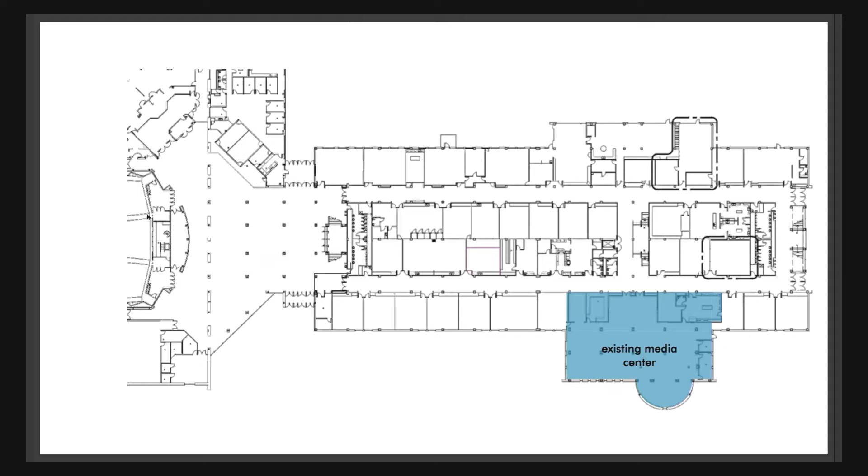So this is showing the existing location for the media center, and this is showing a proposal for where the media center would be. The location to the left of the screen is the entry dining commons, so we would be connecting the dining commons to a stair that connects first and second floors, that ultimately connects to this new media center, which is acoustically separated from the rest of the school but visually very open through glass.

The other thing this was doing was trying to create a dining facility that integrated more learning environments, so that the dining facility was used 8 hours of the day for breakout learning purposes versus just the 2 hours for lunch.

So extending what the resources would be as a library, we were asking ourselves what all could you integrate within this resource: creating larger learning pockets or pull-out spaces for students, a place for all learners, a place for self-directed learning, meaning you wouldn't necessarily need teachers involved in what's happening in some of those spaces, a place for digital creation, student success, a great environment for reading and literature, public forums or pitch space for students to present their work, and certainly a place that's flexible so this media center can continue to evolve.

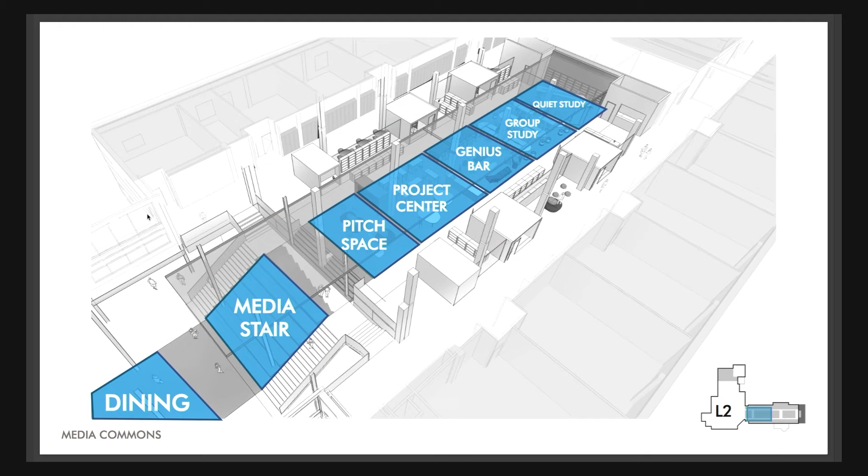And just for orientation, where you're seeing this new media stair, this is where there's an existing staircase to get to the second floor. You don't have visual connection to the second floor in this location, but we're just reorganizing how that works.

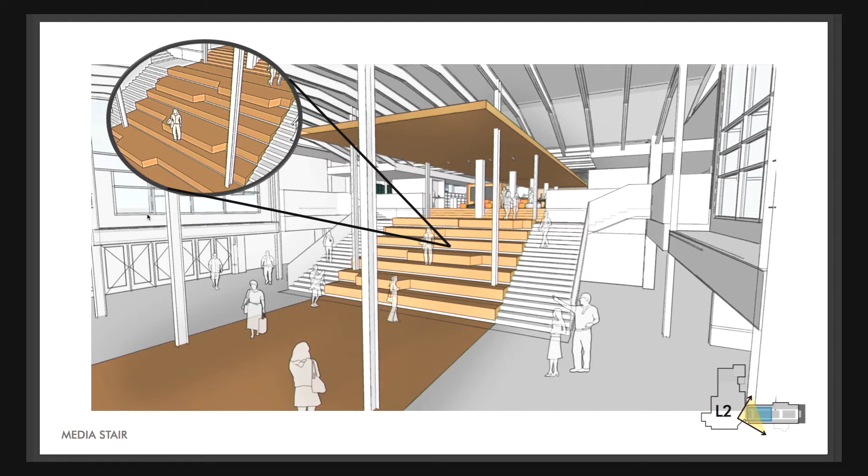So this is a slightly more eye-level view looking at the media stair connecting those two spaces. These are deep treads so students can use this space for dining, student breakout, or social engagement. We're thinking there may be a large projection screen, so you could get 50 to 100 students on this stair looking at a larger presentation for a pitch space or presentation space. It would be used for a variety of purposes, and this is just some examples of what that might look like.

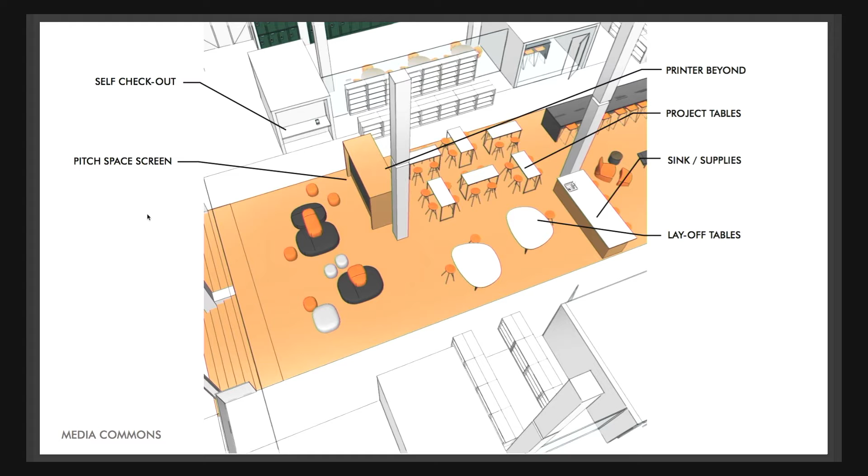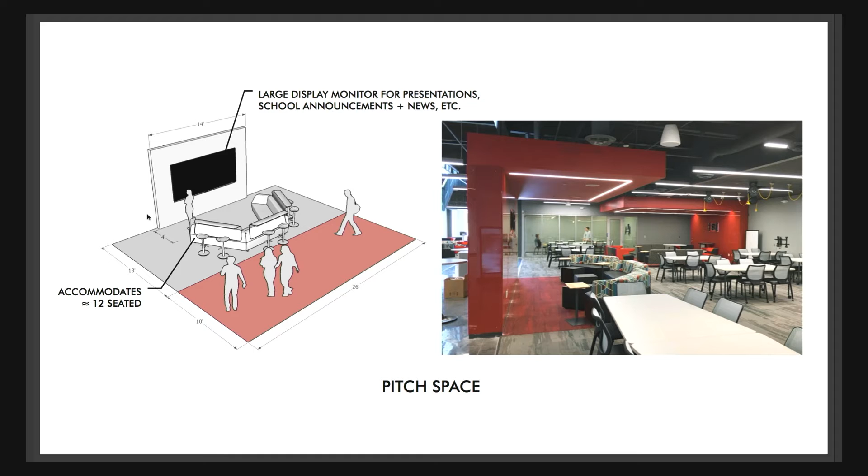As we move further to the east through the library, we're integrating pitch space, small group space for students to present their work. This might be the size of a classroom or smaller. Checkout stations, and an area we're calling a project center, more for self-directed learning—it's like a soft maker space for students to do small projects. These are just a couple examples of those types of spaces: pitch space tied to audiovisual, and project centers where you might have printers, supplies, large work surfaces.

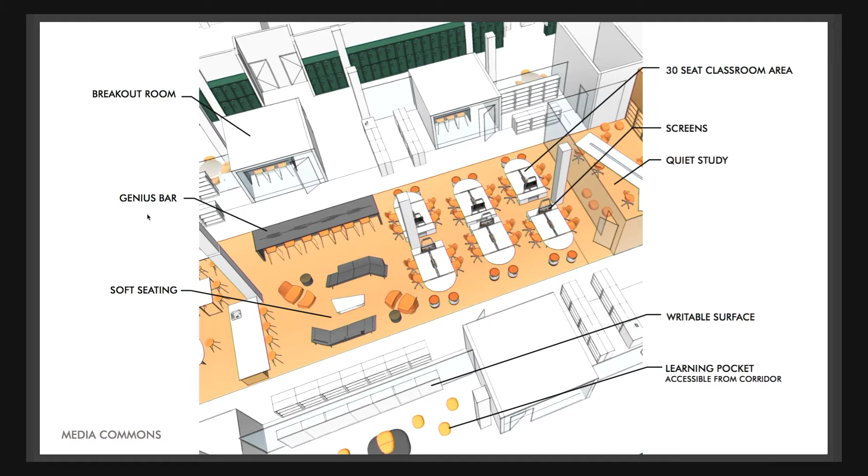Moving further east into the library, we're integrating a space we're calling a genius bar. This would be an area where you'd get library assistants or IT assistants, bringing IT into the media center in a much more robust way—also a way of increasing utilization of the space. Creating soft seating that's open, and a larger gathering space of approximately 30 students. This would simply be to bring a normal class into the library, very similar to how it's used today. And some examples of those spaces.

So a support center—that's student success, library support, IT support—and quiet zones.

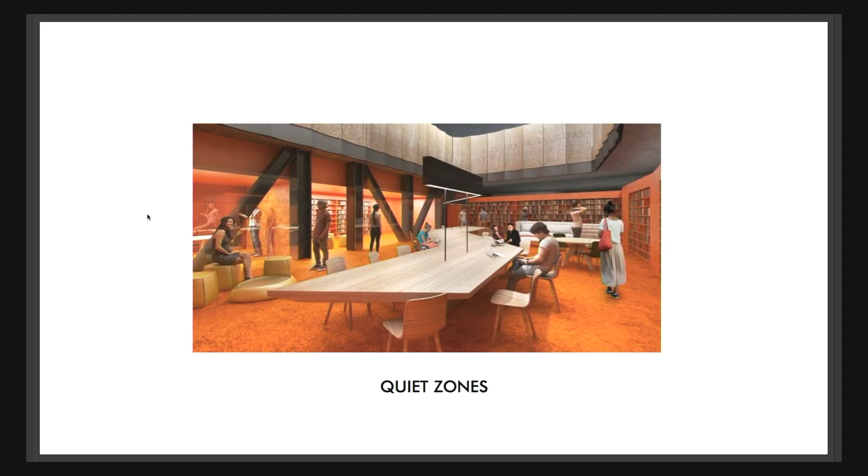That we are creating between the media center and the primary corridors. So this is really a buffer space where there's books and breakout areas so that you create a quieter environment within the media center.

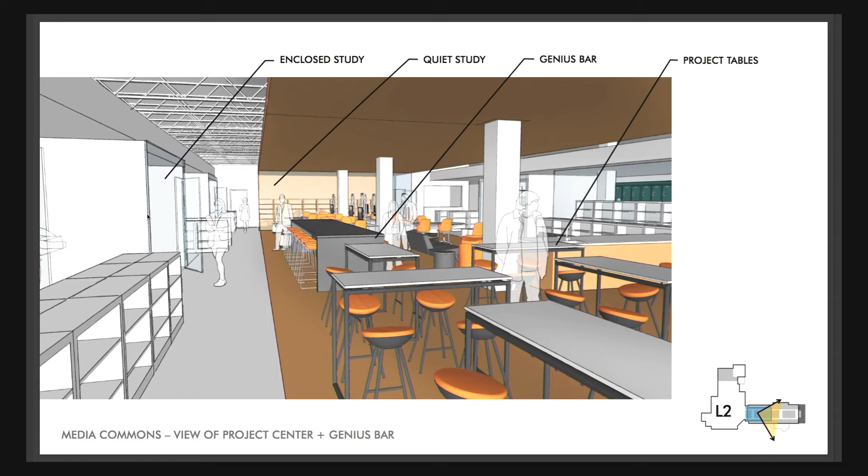And we're returning the corridors that currently look like this, to that—so again, we're creating a visual connection to the media center, being very open, but for the most part being acoustically separated from the corridors.

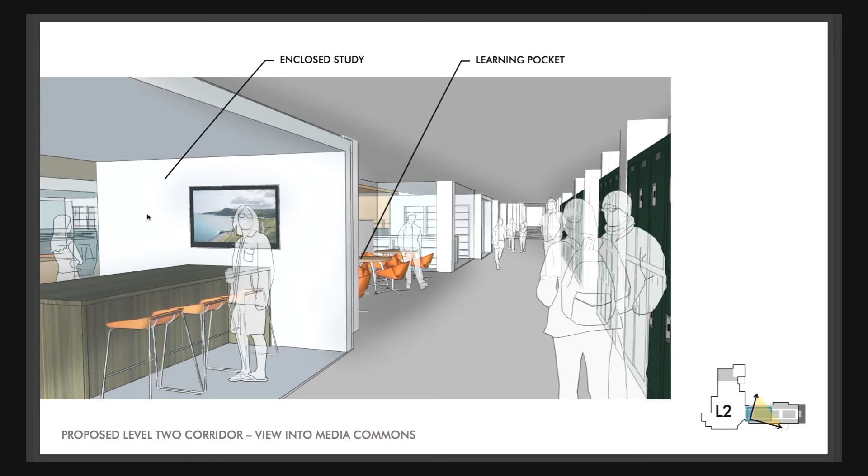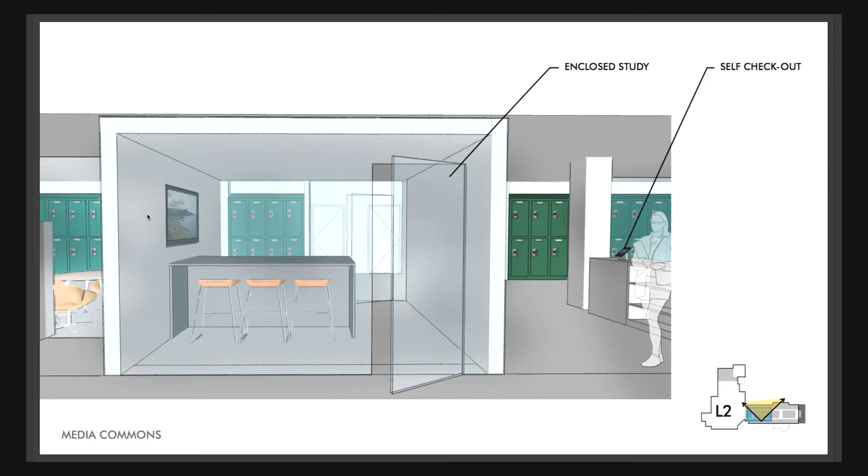Within those breakout areas, you would have group work or pull-out space from the classrooms. These spaces could be used by both the media center or from the classrooms for pull-out. This is an example of what that might look like—typically spaces that would seat 4 to 6 students, with a direct line of sight to the adjacent classrooms.

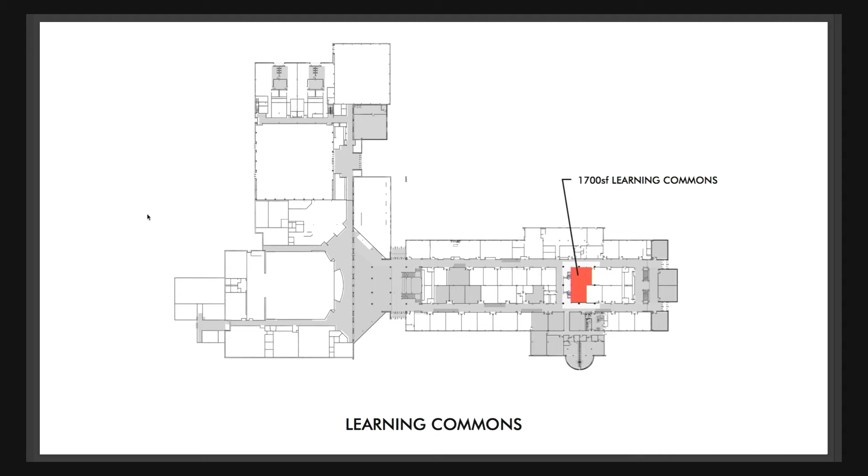Moving to some of the other program within the school, we have a centrally located learning commons. This is a programmatic piece that was in the original master plan. It serves a multitude of functions—it's really a multi-purpose space for the school. It can be an area for all faculty meetings, an area for testing, or more of a traditional learning commons for project-based learning, where one or two classrooms pull out into this space. It's larger, and it allows for more hands-on activities.

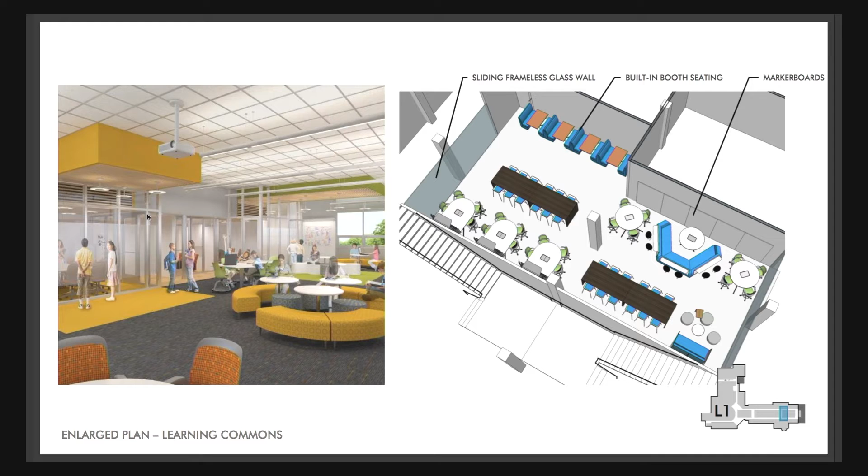This is an example of what that might look like on the left, and on the right, this is the actual space that's been carved out for that within Free State High School—about 1,700 square feet, compared to the 700 to 720 square feet of a normal classroom. So it's a considerably larger space.

One of the primary objectives within the master plan that we're still carrying forward is creating secondary and tertiary learning spaces throughout the school. These are areas outside of the primary classroom where students usually pull out to do other activities. We know through our experience that creating those spaces directly outside of the classroom, to the extent possible, is when those areas are most effective, and having transparency to those areas is critical.

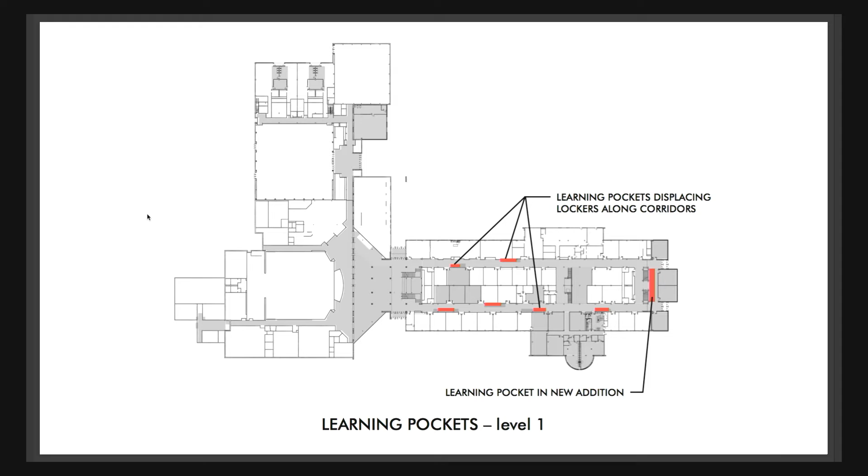So we've removed lockers for the studies we discussed earlier in strategic locations so that we could create these learning pockets adjacent to classrooms. You can see they're scattered throughout level 1 and level 2, and the 3 red areas on the left side are the ones shared by the media center as well.

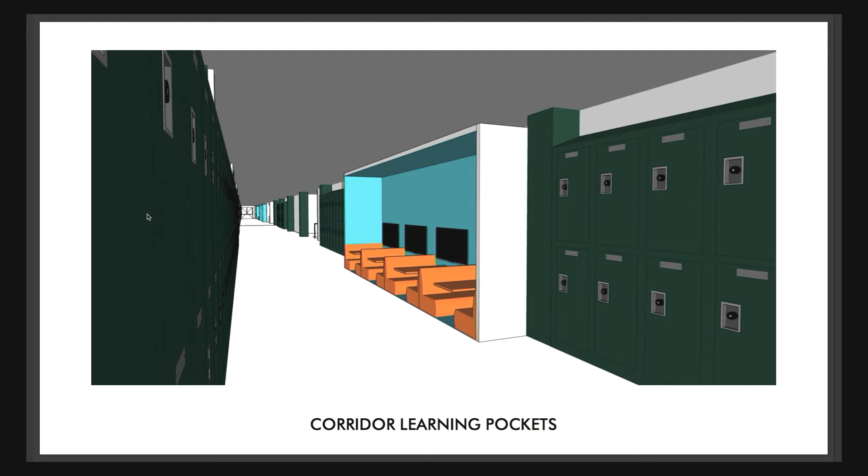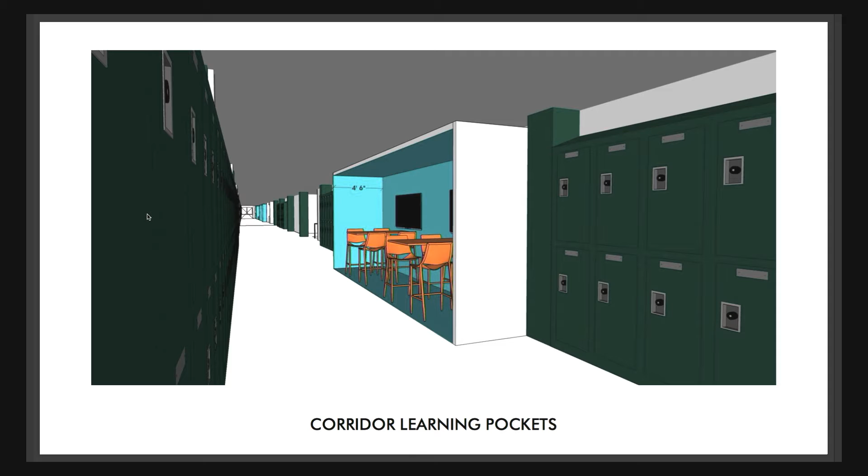And this is just a rendering of what those might look like. We've removed lockers in part of the corridor, and in this particular case, we've created bench seating, so this area might seat 4 students. It'd be tied to monitors for connecting AV, and this is a furniture solution that's very similar to that, providing a variety of seating environments, directly tied to the classrooms for secondary learning.

Special education is moving to the location vacated by the media center. The benefit to this space is that it's a 2-story, or about a 1.5 story volume in some locations, so it's taller, but they also get natural daylighting, which they did not have before.

We're also able to accommodate in this area the diagram we presented in the master plan. We created a new diagram working with the district's special education group, and that would be more flexible in accommodating some of the future needs for that specific program.

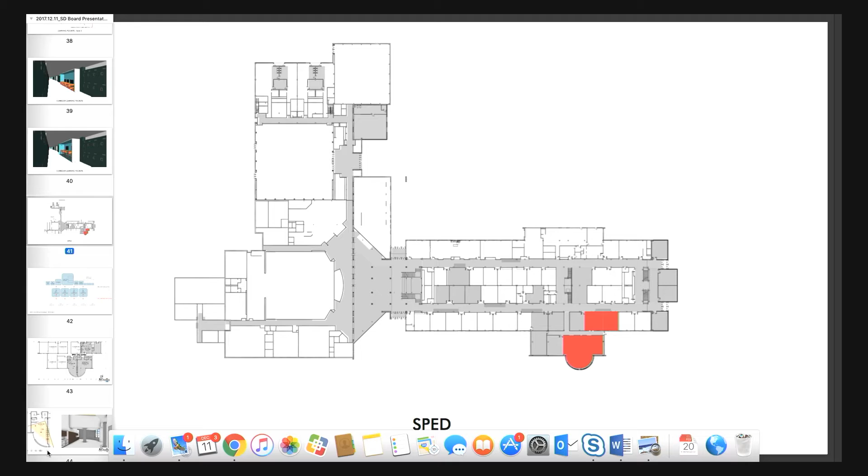Can you flip back a couple screens? Does everybody remember where the SPED rooms are now? The rooms that are kind of in the middle - that's where the current SPED is, right there. Good point. Nice if we all knew the building.

Yes, the design team - if I'm saying something that's lost you, please stop me and I'd be happy to go into more depth. But yes, they were basically embedded within the school, and so that program didn't receive any natural daylighting, so we see this as being a huge advantage for that particular group.

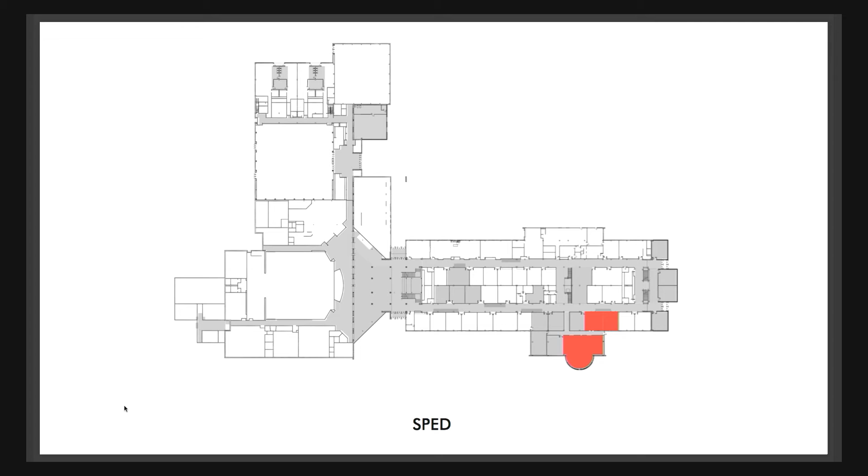These other 5 rooms labeled classroom are recaptured classrooms where media was before, so we've created classrooms to the same size standard as the rest of the school. One of the goals is to increase classroom capacity to accommodate an ultimate population of 2,000 students. The math worked out is to create an 80% occupancy of classrooms at 2,000 students, with 30 students in every classroom.

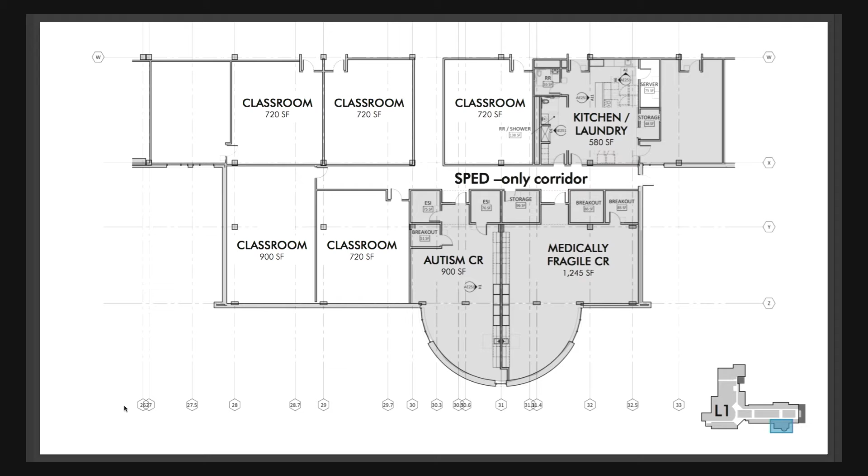So that's how we arrived at the number of additional classrooms you would need. What that came to is 7 additional classrooms, and you'll see in a moment that we ended up with 8 - so we achieved some additional classroom capacity even beyond what we had in the master plan.

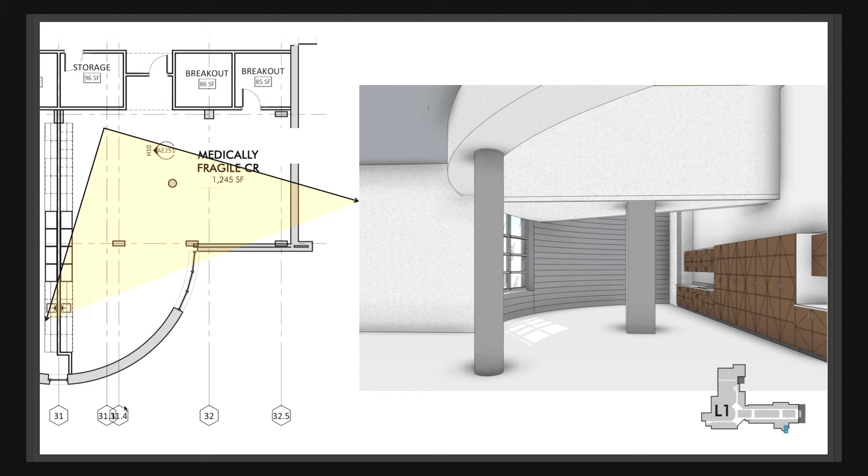This is just a couple eye-level views of those 2 special education classrooms, the Autism Room and the medically fragile room, again illustrating the higher volume space and some of the daylighting.

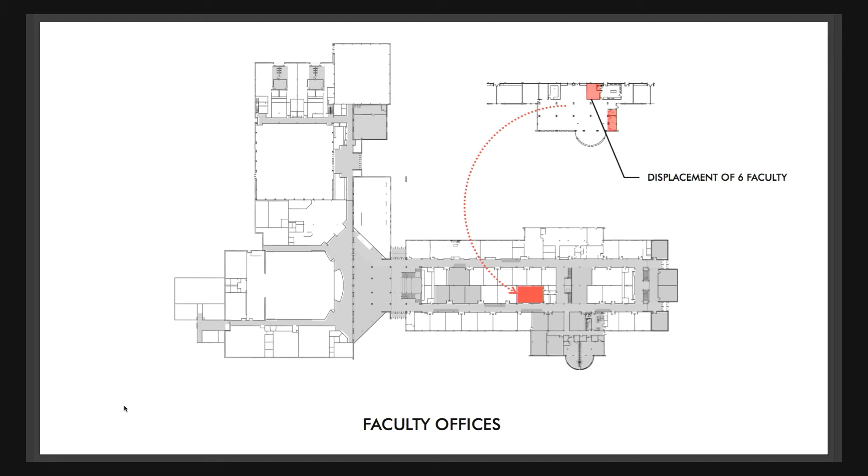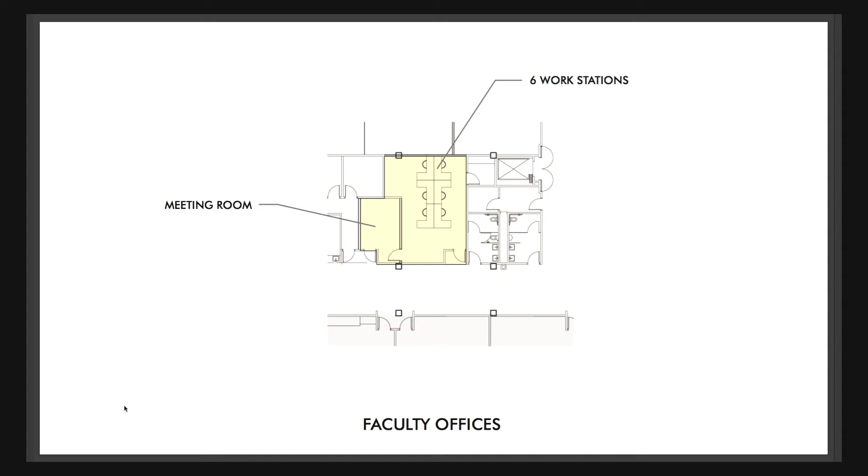In moving the Media Center program out of their current location, we've displaced some offices, so this is showing the relocation of those offices. And this is how that lays out - we've created a shared environment for the 6 faculty workers who had a shared environment before, but we've added a meeting room that they did not have before.

Creating all gender facilities was also a goal for all the schools touched in this bond issue to some extent. For this school, we've created 1 restroom bank that is all gender. The way we're doing that is creating an environment with open sight lines from the primary corridors, but every restroom is in its own room - individual rooms versus being gender specific.

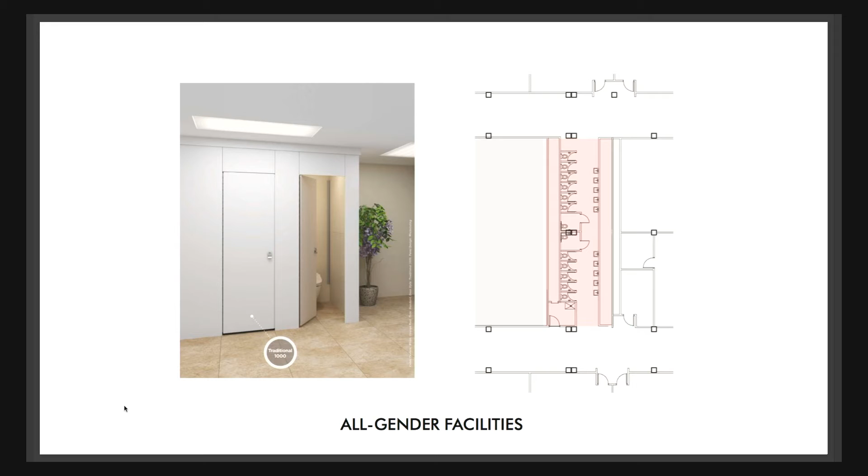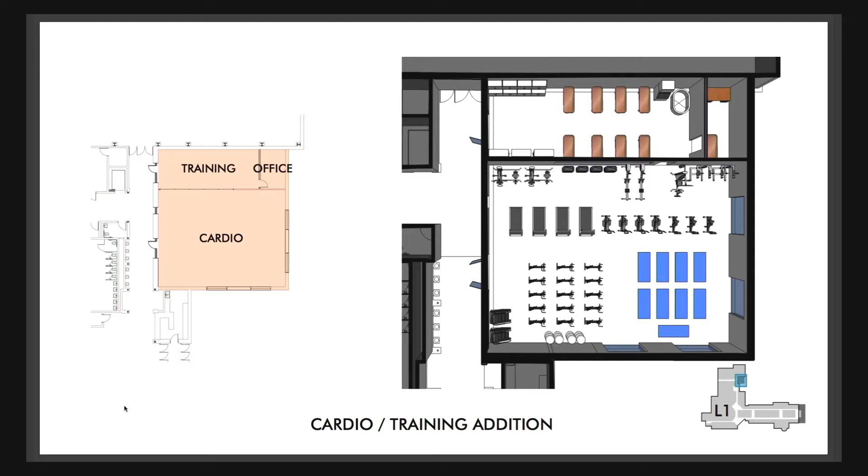Looking at athletics, there's several locations where we've made improvements. There's a 3,000 square foot addition on the north side of the building for cardio and training - that's what you're seeing on the right. The locker room renovations include taking the gang showers and converting those to an office suite. The idea of centralizing that office suite is so you have sight lines to the students at all times, and then individual shower stalls, in lieu of the gang showers they had before.

Where the private offices were before, we've changed those to private changing rooms, again just trying to increase the private opportunities for any of the students relative to restrooms, athletic training, or changing rooms.

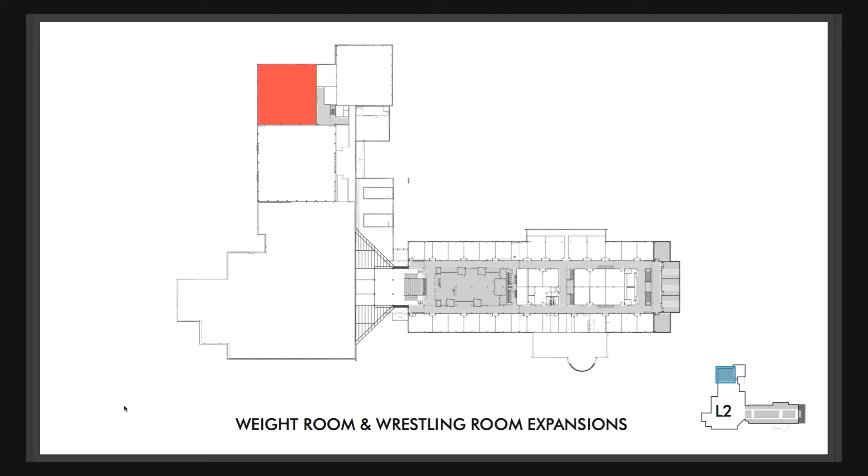Are these still separated in a privacy? Privacy's added - these are still gendered as far as locker rooms. That's correct. Has that plan gone to the student group, or are there plans to?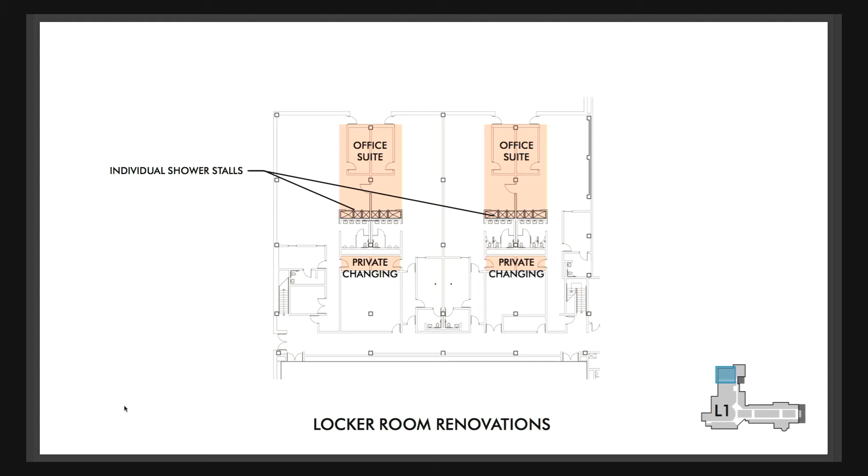Student council will see it next week. Tomorrow, tomorrow. I'm wondering a little bit. I just came back from it.

The idea of a binary system being used as what we know of as a changing frame for gender, holding on to that may be problematic sooner than later.

It's just like, how final is this and how much feedback? So I'm somewhat surprised because I don't know if I just was left off or if it... I think this may warrant it. Okay, okay.

So you said there's 4 classrooms. Does that mean we're doing 2 mock-ups at each high school, or are we doing all four at each high school? And are those already set up or to be set up?

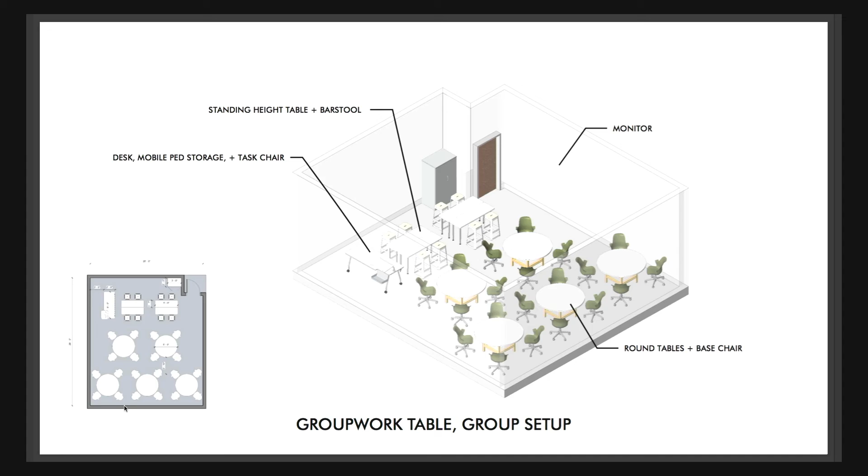So I can go back to those if there are any questions, but that's ongoing. It's kind of in its infancy, so we don't have anything to report from that yet, but that should help us guide the direction for what the appropriate solutions are for classrooms.

There is some site work associated with Free State High School. The primary components are repaving the east parking lot, and creating a new parking lot to the southwest corner of the school that will accommodate 100 additional cars. There's also an ADA accessible route connecting the school to the athletic fields to the west.

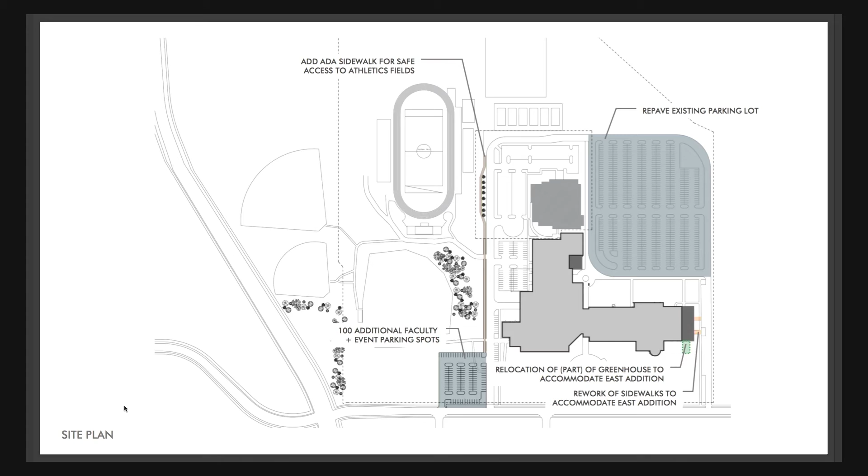Right now there are several locations where you don't have a clear path from the school across the street, or an ADA accessible route to those fields. For MEP, I won't go into great detail, but the master plan lists a series of prioritized MEP improvements. All of those, priorities 1 through 3, were accepted in the master plan, so we are pursuing all of those upgrades. There were also improvements to replace or repair roofing where necessary, so that will be part of this as well.

Kyle alluded to this, but just to go into specifics, comparing the master plan to the schematic design, we were able to decrease the amount of new construction. A lot of that wasn't decreasing program, it was increasing the efficiency of how we were gaining that program, creating fewer corridors to get to it.

In doing that, we were able to increase the renovation by over 25,000 square feet in addition to what was in the master plan. We see that as pretty beneficial from the respect of touching the school in more places.

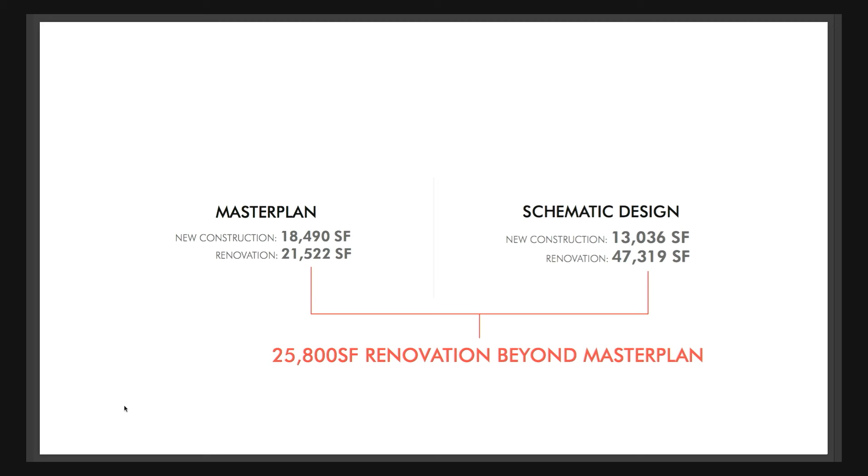Revisiting the schedule, we're about two-thirds of the way through design development. This is a phase where we've mostly wrapped up the schematic ideas, but we're starting to get into the details with our engineers developing those ideas. As Kyle said, we're about a month away from getting into construction documents, where we document all of this for bidding.

And that's all I have. Are there any questions? Pass the mic around if board members want to ask questions.

We have it easy compared to Lawrence, but there's still going to be disruption, so I'm wondering what the thinking is in general. The details of that we don't know yet — very good question. We're just getting to a point where we can start the phasing discussions with McCown Gordon, so we're sitting down to have those conversations right now. I can't tell you exactly what the plan is, but the number one priority is to minimize disruption to the students.

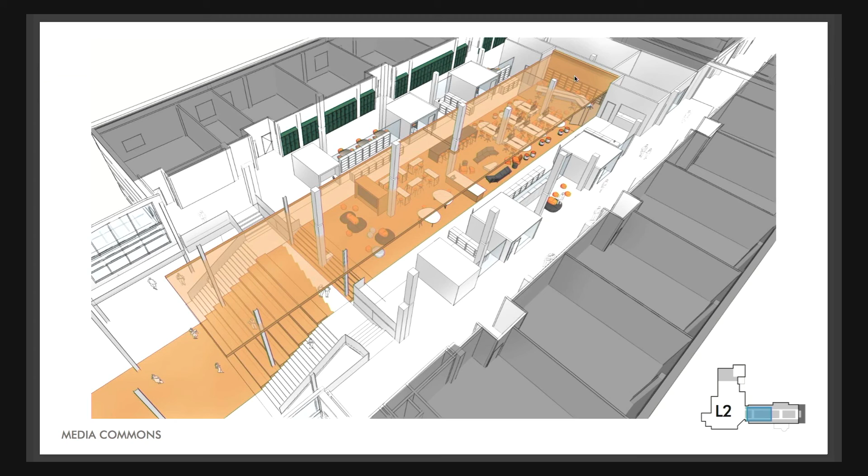Students... I think that's all dependent on how many lunches we have and how many kids we're serving. What works to our benefit right now is having open lunch. If the decision was ever made to close lunch and we went to 2,000 students, I would expect us to have some issues, but it would also be a capacity issue of just the cafeteria itself.

Quite honestly, some of these design changes are going to help with capacity in the cafeteria because the learning stairs could serve as a place for students to continue to spread up towards the Library Media Center, really increasing our square footage quite a bit for that space. As far as how we serve, I think we probably serve in the most efficient way we can right now with kind of a come-in-and-scatter approach.

And so it's not currently an issue, but with some policy changes and things like that, then I think we could be looking for some opportunity to probably address that.

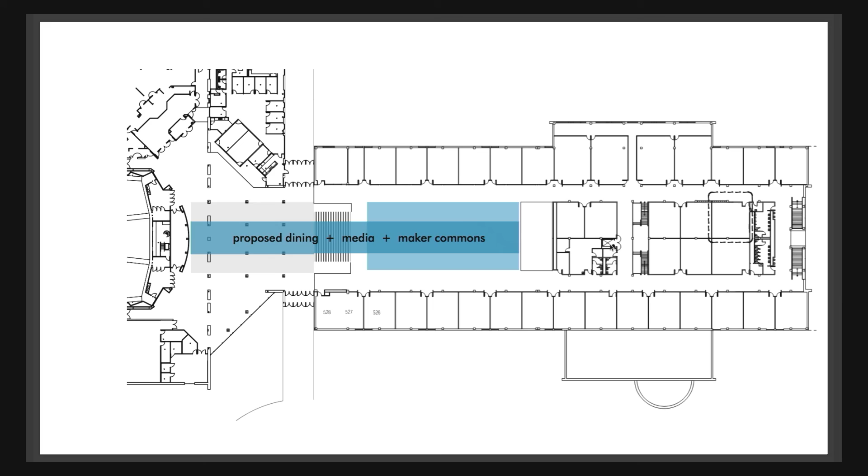It's definitely been a discussion point, so we're cognizant of making sure that we're accommodating. I think in general the strategy is to try and create as much diversity of options for students as we can. So some of those may include high top tables, but certainly there'd be options that are lower or accommodating for those in wheelchairs and with other disabilities. The same as with the media center.

The media center, we're just showing right now, at this particular phase, furniture so that we can begin to populate it and give you a sense of what it looks like, but we have not started to go through the exercise of seeing exactly what furniture makes sense within those spaces. Absolutely, yeah, absolutely.

Kyle just touched on it a little bit, but the diversity in the furniture - in every one of the classroom mock-ups that we're doing, the pilot rooms, there's a variety of different furniture, we don't go exclusively tall tables. So we do some tall tables. Some of those are adjustable, even adjustable height, so you can manage that. Some of our stools are even adjustable height in there.

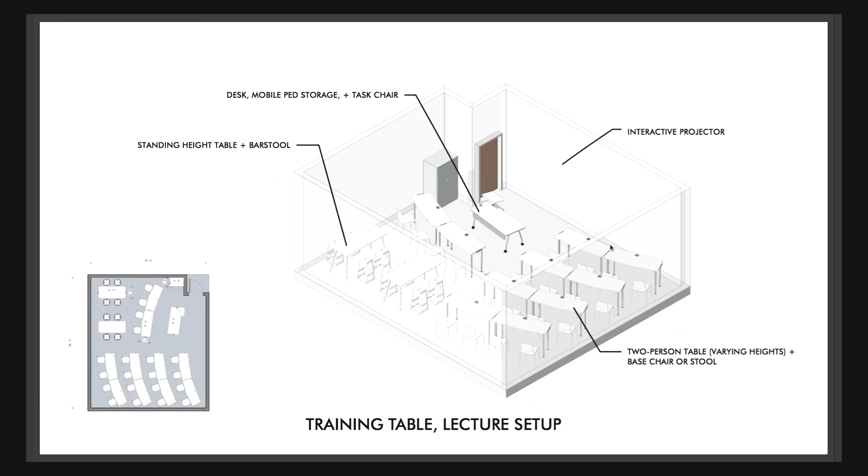But then we're also doing rectangles, triangles, different things like that. And honestly, the rectangles that seat 2 or the triangle tables actually have a wider clearance than what our current desks do, which makes them more accommodating than our current furniture setup. The current just rectangle desks aren't probably as suitable to a student in a wheelchair.